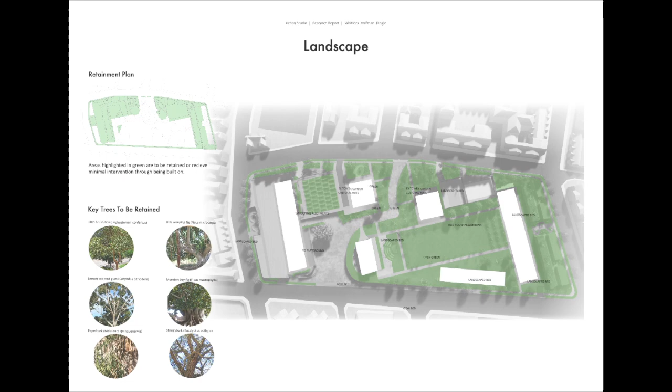On the ground plane, tight-knit ground cover is removed and replaced with low-lying shrubs which do not impede vision. The more open site allows for better access of emergency vehicles.

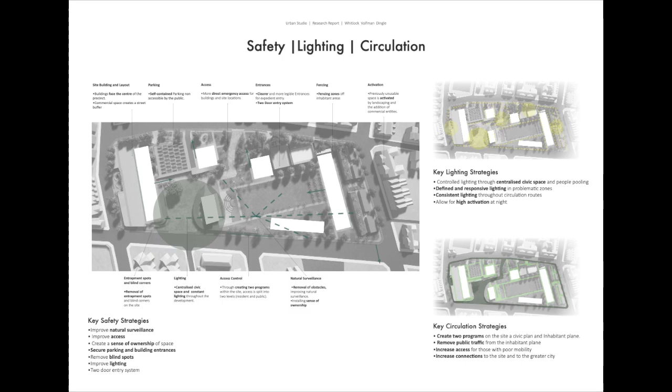Through creating two programs within the site, access is split into two levels, one being the resident plane and the other being the civic plane. The civic plane holds the commercial spaces whilst allowing for traffic and movement. The inhabitant plane is generally at a constant level, whilst the civic plane bisects the site, adhering to the general slope of the site. This removes the pressures of public traffic and public issues, whilst improving access control, lighting and general safety on site.

Through social and economic research, a tenure mix was established which benefits the various stakeholders involved with the development. As per our design ethos, this was based on social and economic factors. There are currently 838 existing social housing apartments on site, which we have retained and enhanced through the financial investment of 178 private apartments and 152 co-living beds. The proposed tenure mix ratio of the site is 70% social housing, 14% co-living and 16% private.

In terms of social outcome, our research suggests that this allows the existing residents to feel as if they were in their original homes, with the option to mix with new private residents. Ultimately, this aims to glue all residents, both existing and new, old and young, together in the same way your quiet cul-de-sac suburban neighbourhood street does on Christmas Day.

From an economic aspect, we incorporated a co-living scheme in order to gain constant rental income, which would allow for the maintenance and sustainability of the site over a long-term period.

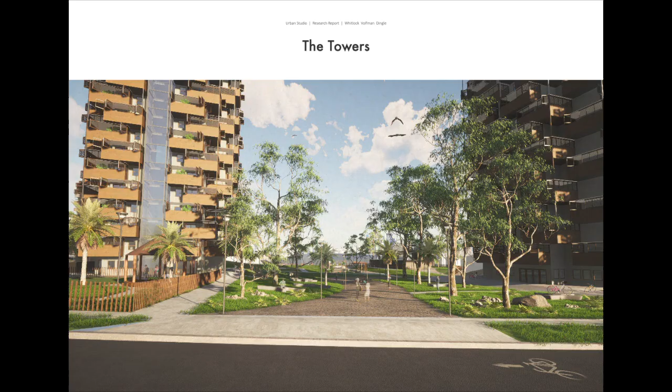We are approaching the towers on a socially responsive level. The works done are in place to benefit the current and future residents, rather than being based wholly on financial gain. Thus, their alterations will be made economically viable by the project as a whole.

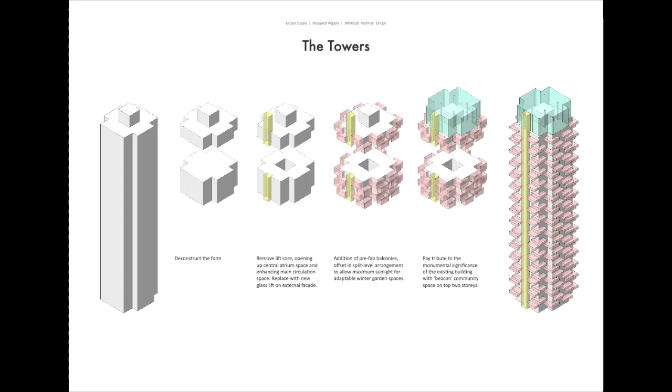Our key strategies are adding an external lift core, opening up the centre to improve the internal environment of the apartment building, adding lightweight balconies to the existing apartments, and extending the towers upwards to create a community area. This community space is fully glazed, accentuating the tower's beacon-like nature, allowing the towers to be seen from distant points in the greater city.

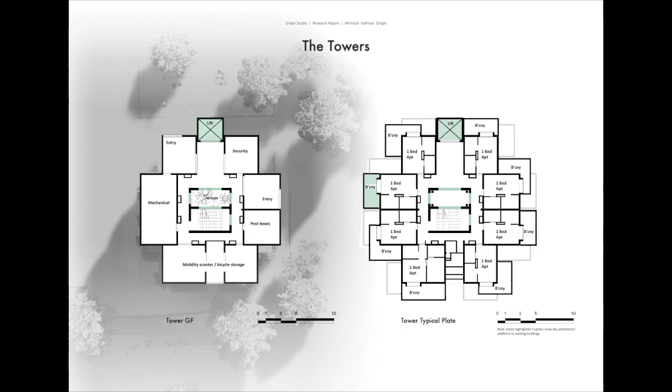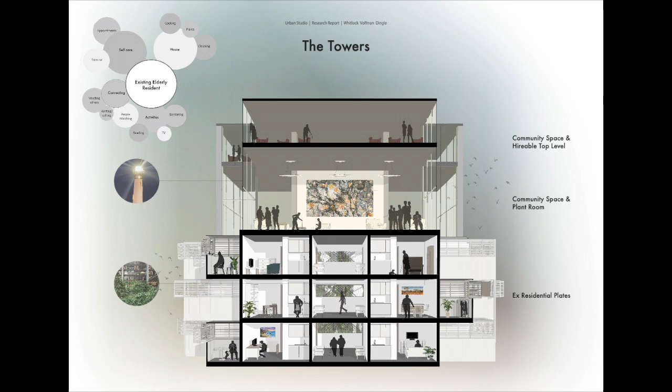Key design elements which are constant throughout the entirety of the Backyard project are external lifts and balcony additions, reorientated entrances to suit the site and surrounding streetscape, two-door entry systems, and the use of solenoid fire doors as much as possible to keep the buildings open.

Much like the towers, we are aiming to improve the quality of life for the existing tenants of the slab blocks. We aim to keep them in their apartments for the duration of the build and permanently retain the dwellings as social housing. We are proposing to alter the slab blocks in a similar manner to the towers.

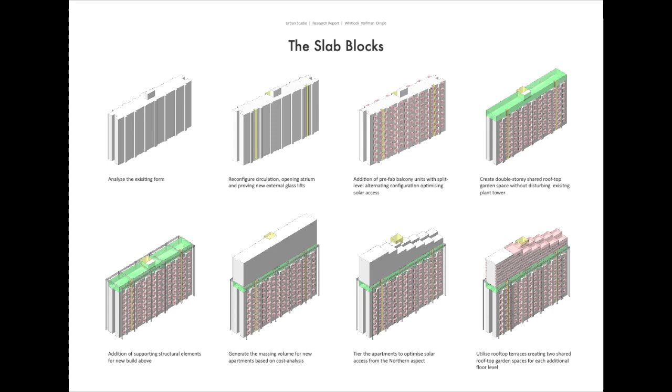However, due to their orientation, we plan to open up the passageway that runs along the building to allow for cross-ventilation and greater light penetration within the building. On top of the existing building, we are enclosing the plant room and opening up the roof space to become a large roof garden in which all residents can enjoy.

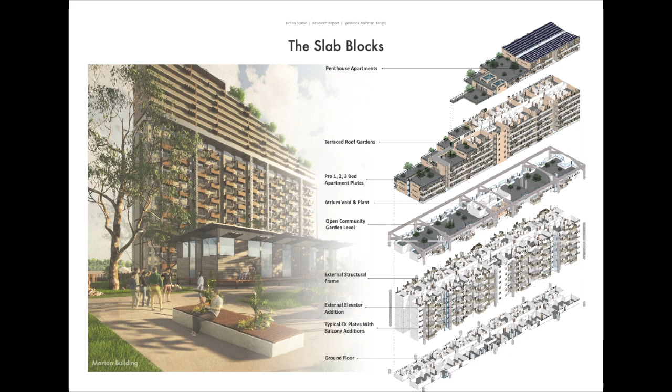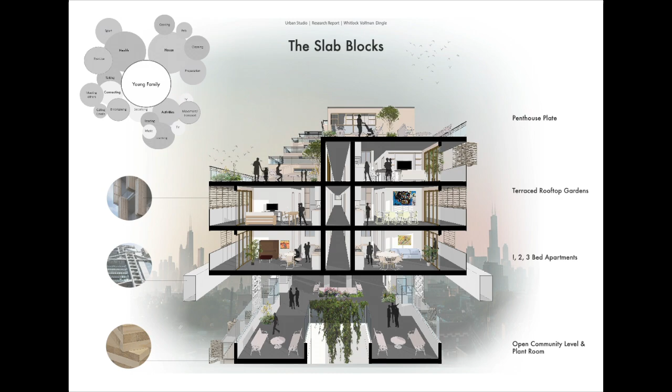On top of the slab blocks, we are proposing various levels of private dwellings in the form of 1, 2 and 3 bedroom apartments. These levels are tiered and pulled back against the northern aspect. In tiering, large shared garden spaces are created. The top level is made up of generous penthouses, each having access to an extensive roof garden.

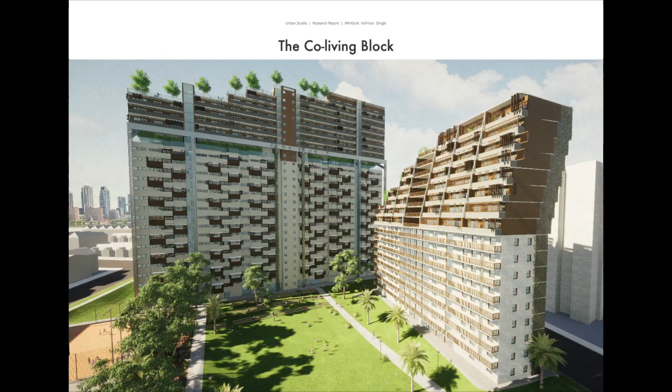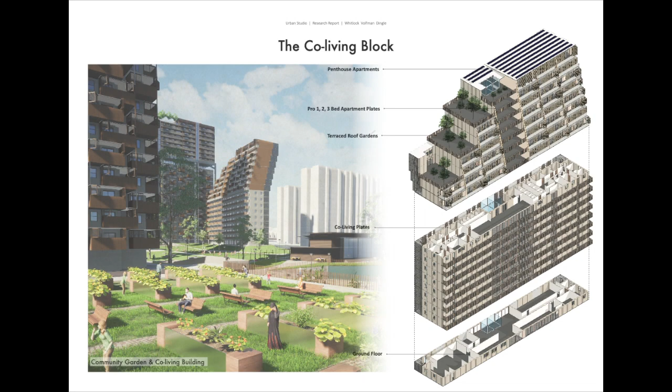The co-living block is made up of shared living levels and private apartments, designed in a similar fashion to the slab block additions. The co-living block is made up of served and servant spaces within the building, dividing the building from the centre outwards. The blended room options are generous enough to allow permanent stay, but compact enough to allow high-yield floor space. Through this plan, we aim to create spaces which can act as low-key office and entertainment spaces, focusing on the needs of students and young professionals.

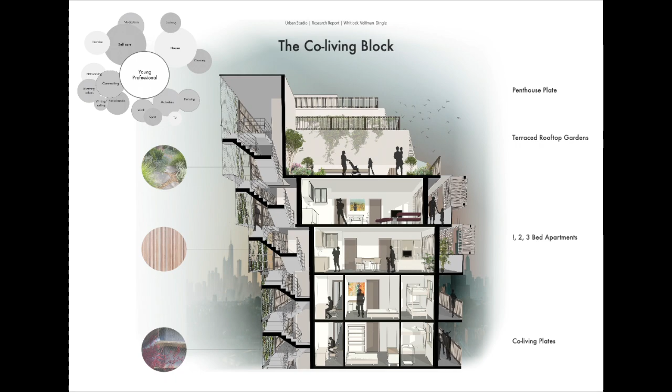Whilst the slab blocks and towers largely cater to existing residents, the co-living block is focused on future residents. Above the co-living floors are residential apartment levels, designed in a similar fashion to the slab blocks, with tiered gardens and penthouses on top. The overriding strategies in materiality and construction are efficiency and speed, using prefabricated CLT construction in the larger elements of addition.

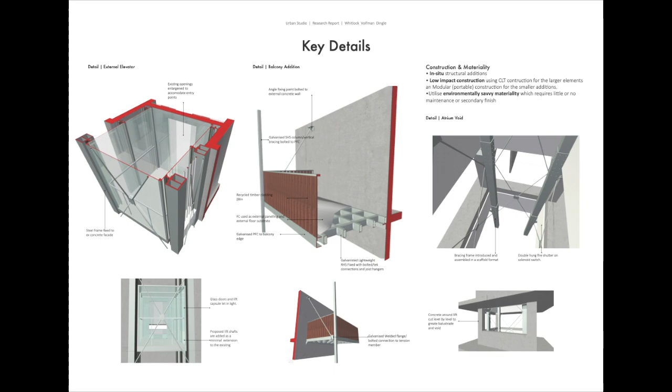Passive design strategies have been implemented into the existing and new buildings in order to achieve maximum thermal comfort for the occupants whilst minimizing energy use.

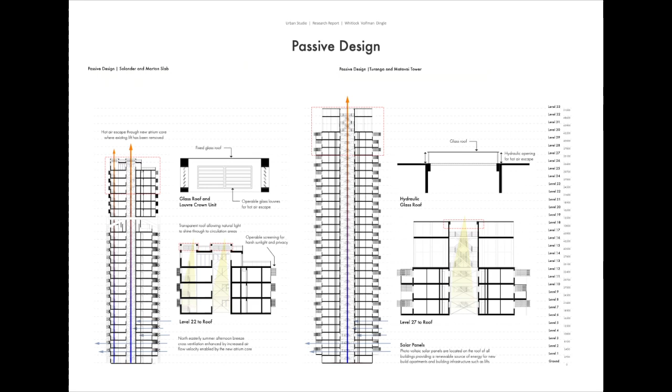The major passive scheme incorporated into both the towers and slab buildings is the atrium core, which acts as hot air release for the buildings. On top of the atrium is a glass louver unit and hydraulic glass roof, both of which can be opened and closed when required. Additionally, the atrium core acts as a light well with reflected mirrors on each floor and improves cross-ventilation.

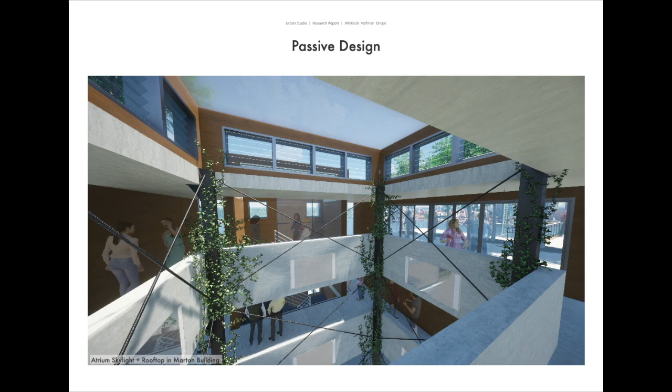In addition to the atrium cores, there is an operable screening on all balcony additions and PV panels on top of the slab and new builds and co-living roof.

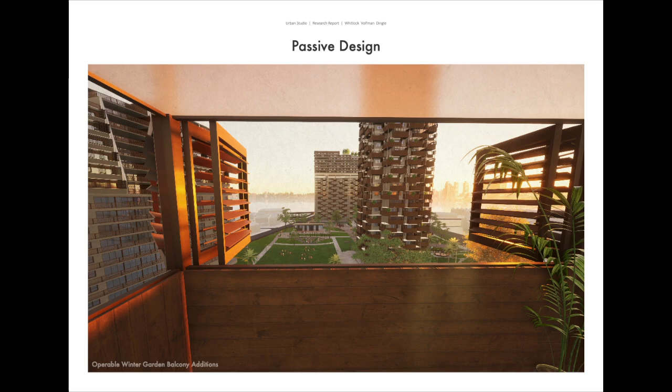We aim to use environmentally savvy materials which require little or no maintenance or secondary finish. In a similar fashion, we aim to plant only natives which require little or no maintenance. Through this, we aim to create honest architecture which suits the Australian landscape and reconnects its users to the architecture as a home and garden.

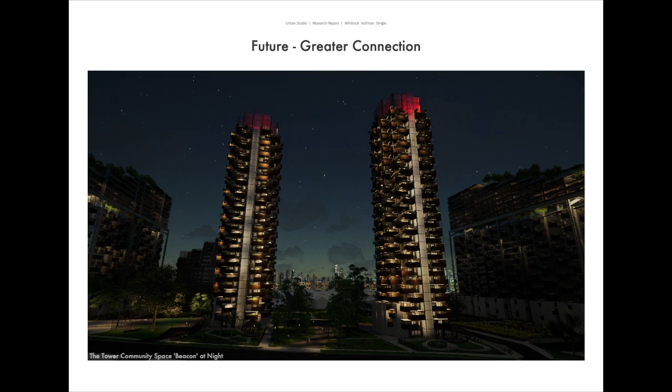The Backyard project aims to both embed and celebrate the precinct within the greater fabric of Sydney. The maintained openness of the precinct allows for markets, vivid shows, carnivals, concerts and other various events to take place.

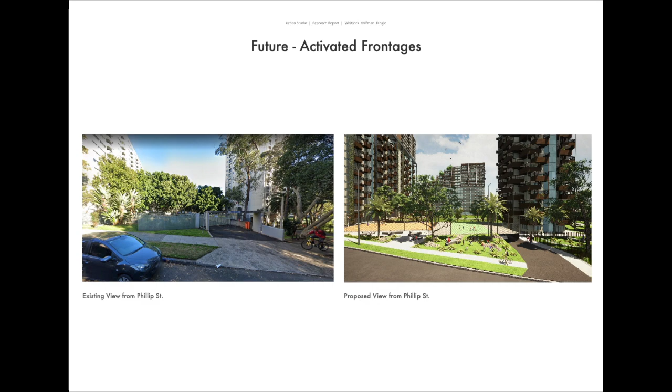In years to come, the precinct will continue to allow people to express themselves and connect with each other, whether that be under the shade of a gum tree, playing sport, or just lazing under the Australian sun.